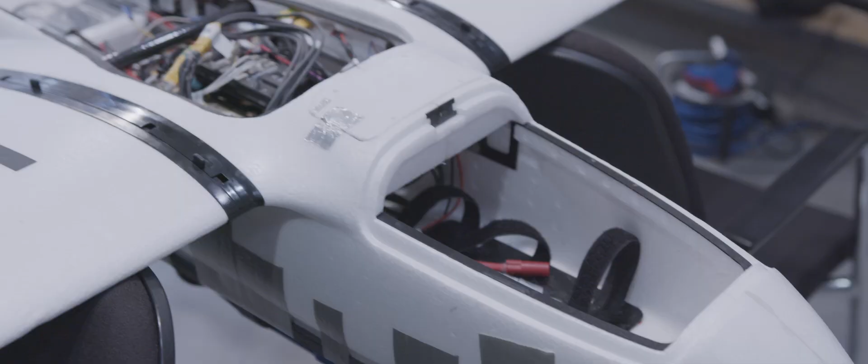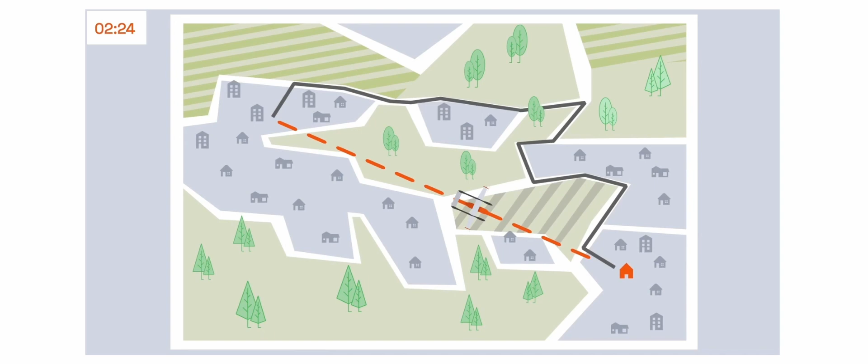The aim of the project Mission Pulse is to test the feasibility of the use case through simulated test missions under realistic conditions. Our final prototype will be able to reach patients within a 6-kilometer radius in 4 to 5 minutes. At the scene of emergency, the defibrillator will be lowered with a winch under remote video supervision and can then be applied by first aiders.

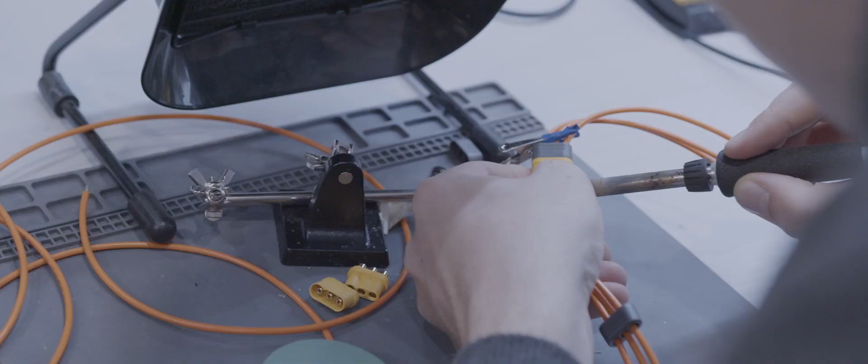Before coming to our sub-teams in more detail, we will explain the certification process. Without a certified drone, we are not allowed to enable our drone to fly in real-life scenarios. Our certification and operational risk assessment will be based on the SORA process, which is defined by EASA. Johannes, can you explain to us what exactly the SORA requires to do?

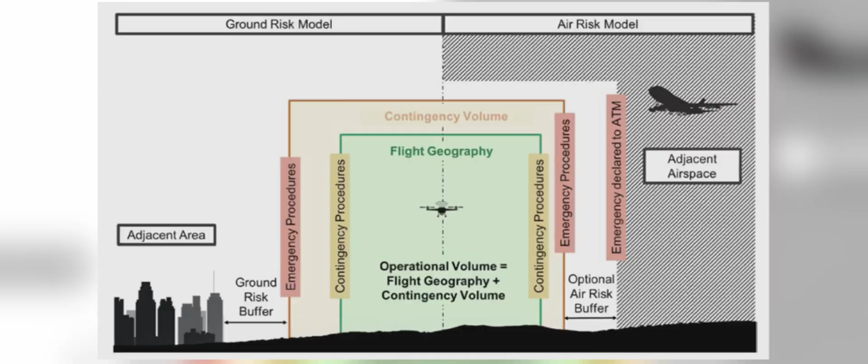The SORA process, which is short for Specific Operations Risk Assessment, defines a standard to operate inside a contingency volume. This volume includes all emergency procedures that prevent possible impacts to the ground or the airspace. A part of the contingency volume is the flight geography. The flight geography and contingency volume define the operational volume of a UAV.

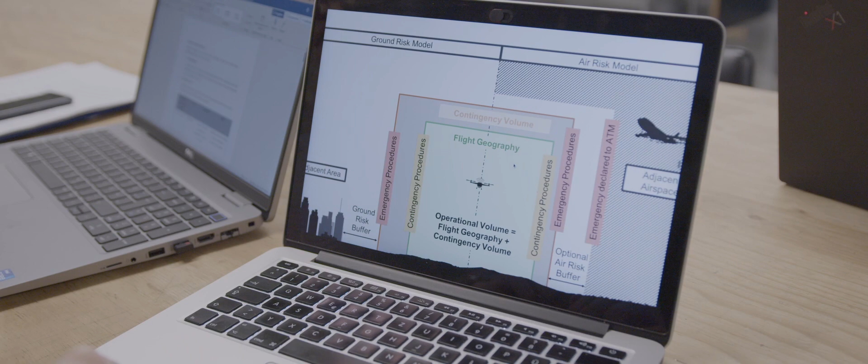We want to achieve a safe operation by reducing two risks. Firstly, the ground risk, possible risks for the ground below a flying object. This means whenever there is an emergency, our last line of safety is a parachute. With this procedure, we lower our ground risk.

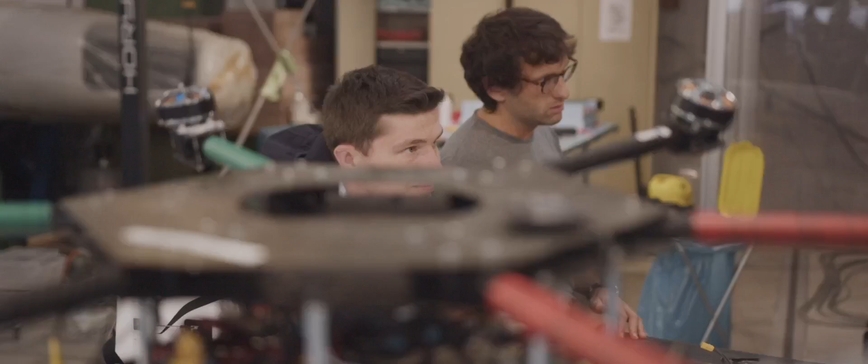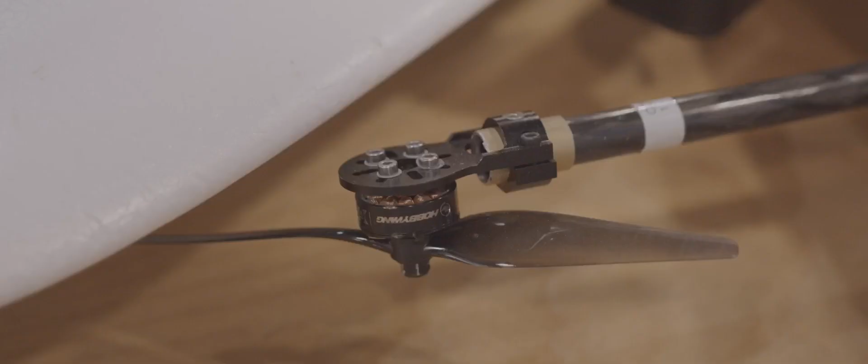Secondly, for possible risks in the air, we assume to operate inside an uncontrolled airspace, flying over rural areas with an altitude lower than 500 feet. By reducing those two risks, we fulfill certain categories in the SORA. More safety measures to our flight will be the determination of zonal safety, calculations of kinetic energy in case of impact, and details to our integrity and assurance level, developing a robust and secure aircraft.

So far, we learned what Horizon plans to achieve with their project Mission Pulse and what the operational requirements are. Now, let's see how Horizon plans to achieve this. To work efficiently, the team is divided into 5 sub-teams. The first one is Business and Certification. Let's talk to Sonja, a member of the Business and Certification team, and see what her tasks are. Sonja, can you explain to us what you do?

I'd love to. So in my team, besides discussing and evaluating the certification and mission requirements, we take care of all the non-technical aspects around Horizon and Mission Pulse. One of them is public relations. We take photos and videos in our workshop called the Horizon Lab, on the flight testing field, and whenever we have team events, then we publish them on our social media channels.

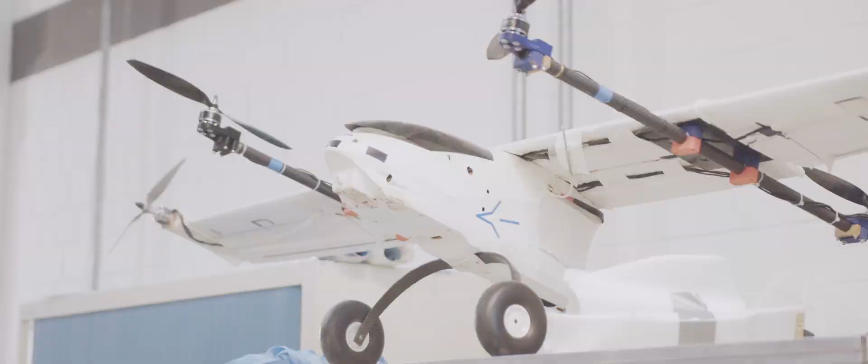We make sure to highlight the differences between our 5 sub-teams, and we want to show what the day-to-day tasks look like. Furthermore, we answer all requests from press and from other students outside of our organization. Strongly connected with PR is the funding process. No money, no project. We are all students, and HORYZN is a non-profit student organization. Therefore, we depend on our sponsors and supporters.

We are very proud and thankful to already have so many great partners who provide all the necessary resources to work on Mission Pulse, may it be by financial support or material donations. If you are interested in being part of our project and help us realize Mission Pulse, you're more than welcome to contact us.

Besides the funding activities, our team also manages the budget, which means buying material on the one side and accounting all the activities legally correctly on the other side.

Another task for our team is the organization of events, whether external, such as our rollout event, or internal, such as our trip to Berchtesgaden in August. We prepare and organize events to foster our teamwork in external relations.

Last but not least, Mission Pulse is not only about developing a UAV which can fulfill the requirements. In the end, the mission is about saving lives. By providing the defibrillator only a few minutes faster than the ambulance, we can triple survival chances. Of course, this goes hand in hand with the application of an AED after we lowered it to the ground.

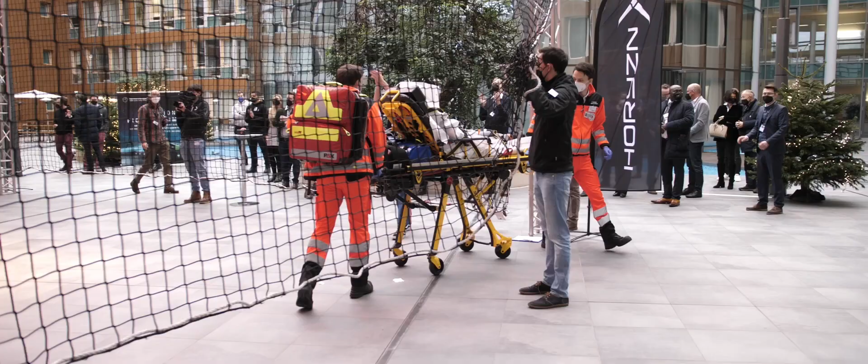So, besides looking for the perfect defibrillator, our team is also in contact with paramedical services, first responders and operators. Who is applying the defibrillator? Where does it make sense? How do we integrate it into the rescue chain in a meaningful way to complement the ambulance? We do a lot of research to find the optimal environment for our drone.

Once certification and mission requirements are determined and evaluated, our next sub-team aims to come up with a suitable drone configuration for our use case. Here's Philip, sub-team lead of our design loop. Their team consists of 15 students, most of whom are studying aerospace. Philip, can you tell us a little bit more about how you come up with a suitable drone configuration and what are the main aspects that you have to consider?

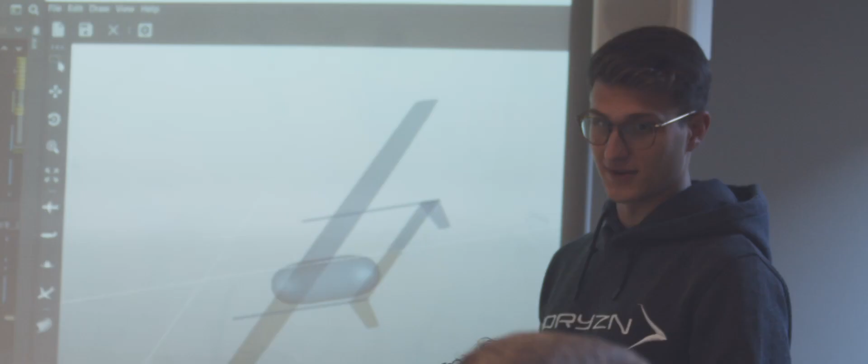The key design drivers for the eVTOL are based on mission performance, such as cruise speed, altitude, takeoff mass and range. We also consider the certification part. For example, the redundancy. There must not be any single point of failure in the system. For finding a final drone configuration, we divided our design process into a conceptual and a preliminary design phase.

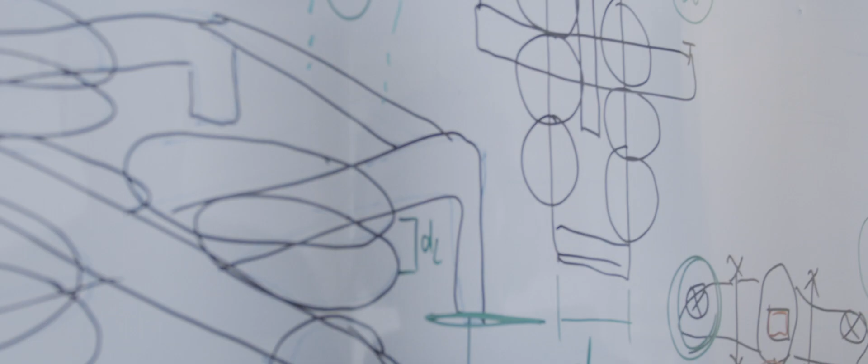In the conceptual design phase, we compared different drone configurations like a helicopter, multicopter or different fixed-wing configurations. These configurations were rated by aerodynamic efficiency, modularity, masses, safety, complexity and further criteria. Based on this rating, the most suitable configurations were pre-selected and the first mission calculations were conducted. Based on numerical values, the best configuration was selected and investigated in the preliminary design phase.

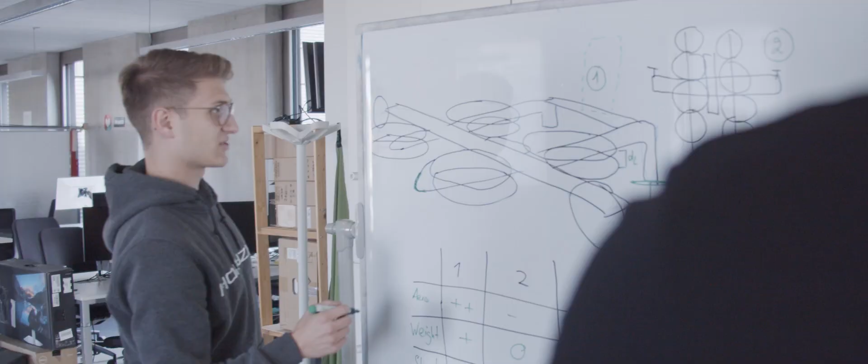As a result, for Mission Pulse, we decided to use a fixed wing configuration with separated rotor systems for hover and cruise flight. One of the biggest challenges in aircraft design is that all design parameters influence each other. For this reason, we built our calculation methods as a loop to iteratively determine the final configuration. This is also where our sub-team name, Design Loop, comes from.

For the preliminary design, we split the different design disciplines of the aircraft into the following 5 sub-modules. First of all, in the flight path module, the trajectory is generated based on the mission segments and operating conditions. Out of the trajectory, we determine the different flight states of our mission. In the aerodynamics module, the forces and moments on the lifting surfaces are calculated.

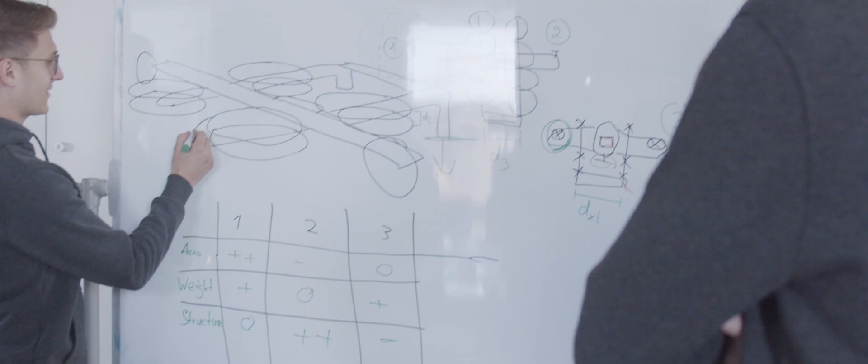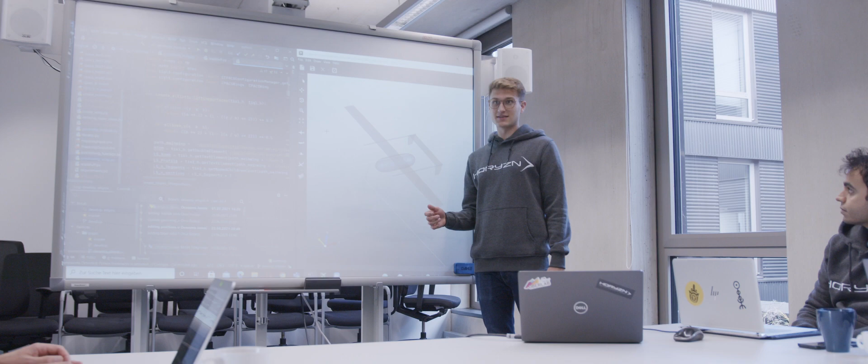Afterwards, based on the forces and moments, the structure of the drone is determined to withstand the bending and torsion of the wing surfaces. Out of this, the masses of the wings and empennage are calculated in the structure module, which is our third submodule. In the performance module, the mission required thrust and power of the propulsion units are also calculated. Within this module, suitable motor, rotor and powertrain configurations, as well as the battery system, are selected out of a database based on torque, efficiency and masses.

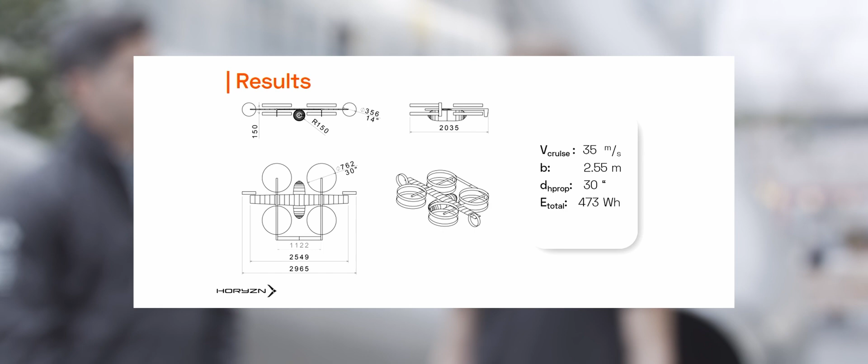Finally, in the geometry module, the modified geometry out of the calculations is modeled. All submodules are self-coded in MATLAB and Python, and the whole loop is integrated in our toolchain management software RCE. The final configuration has a span of 2.55 meters and the takeoff weight is approximately 17 kilograms.

We just learned that the design loop team iteratively repeats their calculations until a final design is fixed. With that final configuration, the next sub-team can keep working. This is Kevin, our head of CAD. Kevin, can you explain to me what you do once design loop forwards you their final results?

Yeah, of course. So we get the final drone configuration from the design loop team, and our job is to model and design a prototype. And for the Mission Pulse project, the prototype's name is Frankenstein 1. And most of our work is actually in front of the computer.

So we take the theoretical values that Design Loop gives us, and we transfer or translate that into a model through computer-aided design. And our job ends with delivering molds or tools to the structure team for them to start their manufacturing phase.

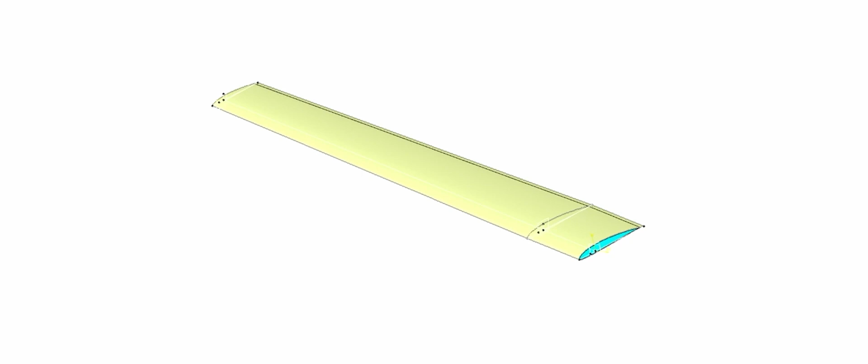The most challenging part of this process is to find technical solutions that are within our weight budget, economically viable and compliant to our manufacturing method, while still maintaining structural integrity in regards to the forces on the aircraft. Each section of the aircraft also requires different design solutions, as the forces or weight requirements are different, presenting varying levels of complexity in each design process.

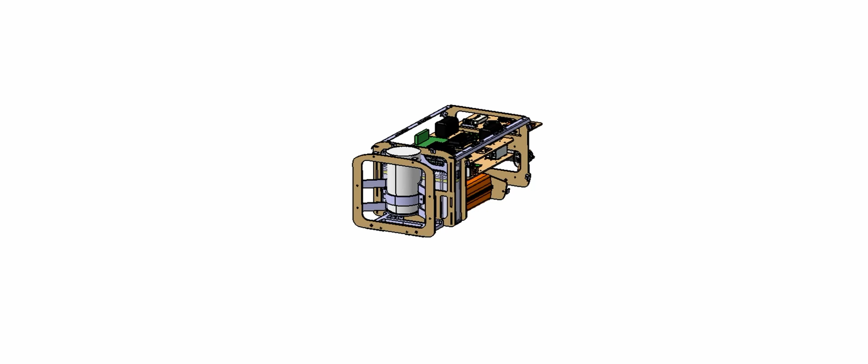As an example, the biggest challenge of the fuselage is to integrate the number of subsystems, such as the electronic plates, the rope mechanism, and the warning system. They all require sufficient space, specific positioning, and a suitable mount to the fuselage. A big organizational challenge, on the other hand, is the coordination between the sub-teams, which often prove to be the bottleneck slowing our design process.

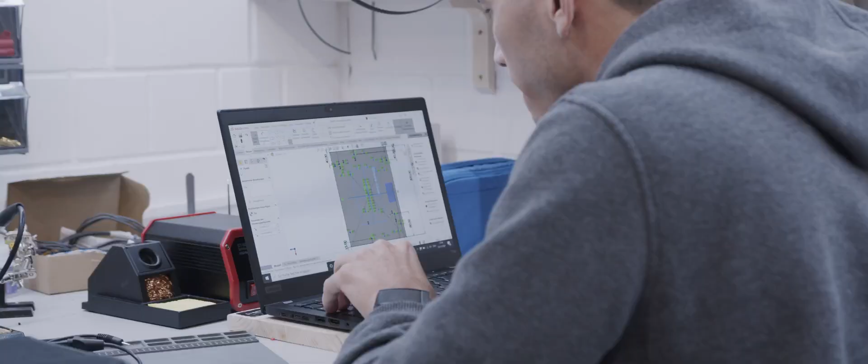Our way to tackle these challenges, while still trying to meet our deadline, is to subdivide the drone into sub-assemblies. Therefore, we have the fuselage, wings, tail, and hover boom, and assigning 2 or 3 team members to each sub-assembly allows a parallel workflow, while still having long brainstorming sessions together to tackle the bigger problems.

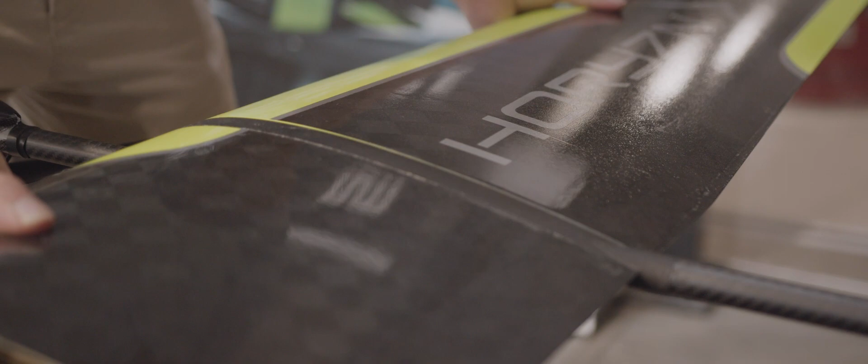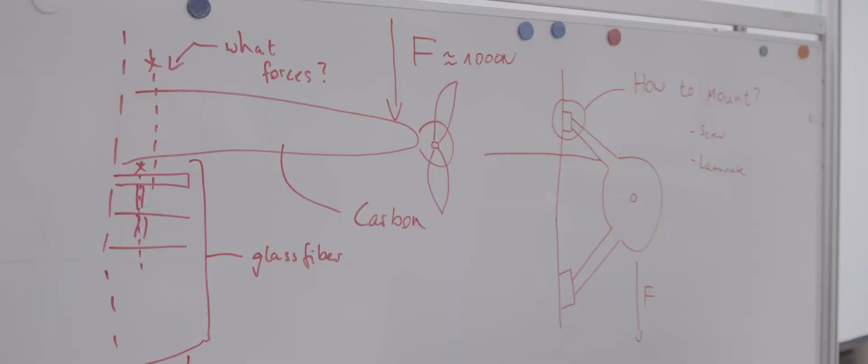For problems that we cannot solve ourselves, we implemented a technical review meeting where representatives of all sub-teams and advisors are present. We also decided to delegate the aesthetic design work to a professional design company, which allowed us to focus on the engineering process purely. We are very happy and proud to have contributed to the team, and we're very grateful for the experiences we gathered along the way.

That sounds great so far. So we have certification and mission requirements. We have a drone configuration from Design Loop and a 3D model of our prototype Frankenstein 1. By the way, if you're wondering where the name comes from, feel free to come by our lab and ask us. This is also where the physical work gets done. Here are Osama and Cosima from our structure sub-team.

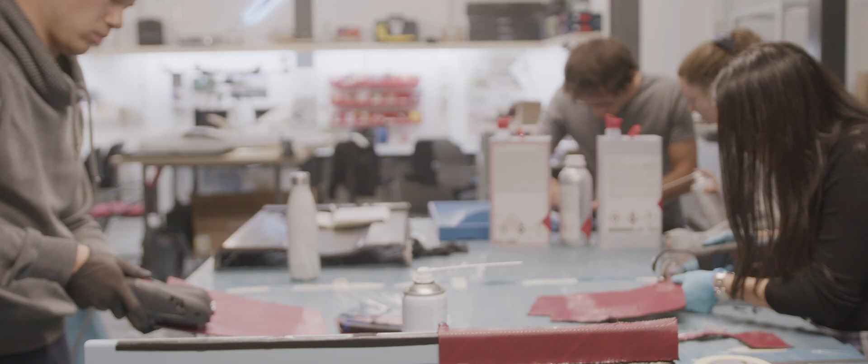Welcome to the structure team, where we build the prototypes in our workshop. We would like to give you a glimpse of our work in the workshop by taking you through the manufacturing processes. When the CAD sub-team finishes their models, the first step is to get the epoxy boards milled to form our master blocks. The master block looks very similar to the final part. Once we finish sealing the surface, the master block is ready for the tooling prepreg.

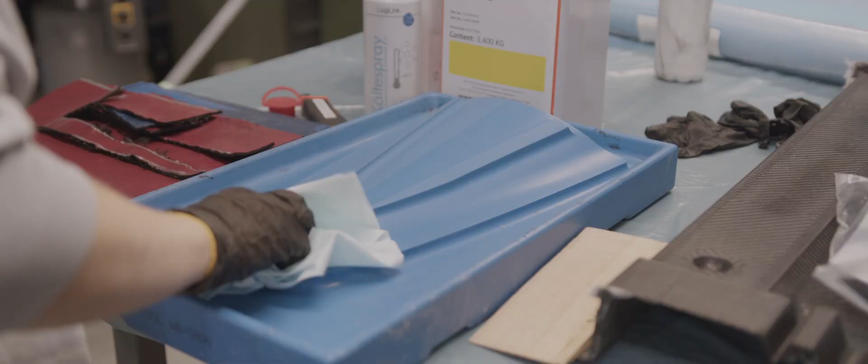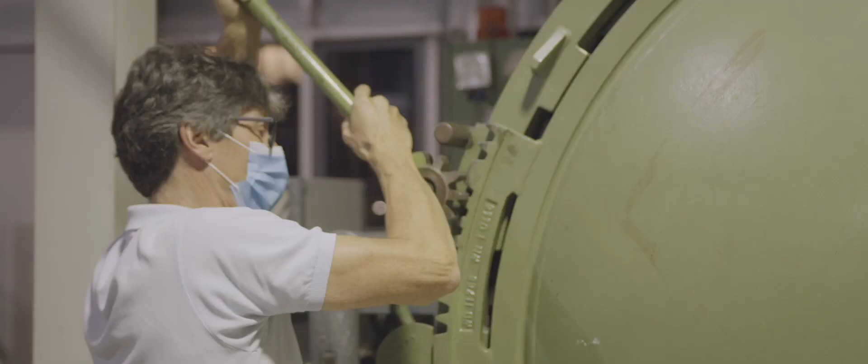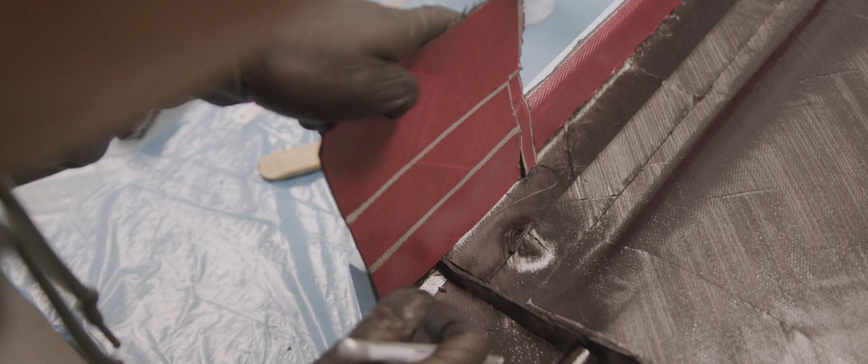Tooling prepreg is a specific kind of pre-impregnated carbon fiber textile, which is used to create the tool. We drape the tooling prepreg perfectly onto the master block and apply vacuum between the layers to get rid of any entrapped air. The master blocks are then put in the autoclave, a large pressure vessel that uses high temperature and pressure to cure the tools. Once out of the autoclave, the tool is removed from the master block and serves as a negative mold for our final parts.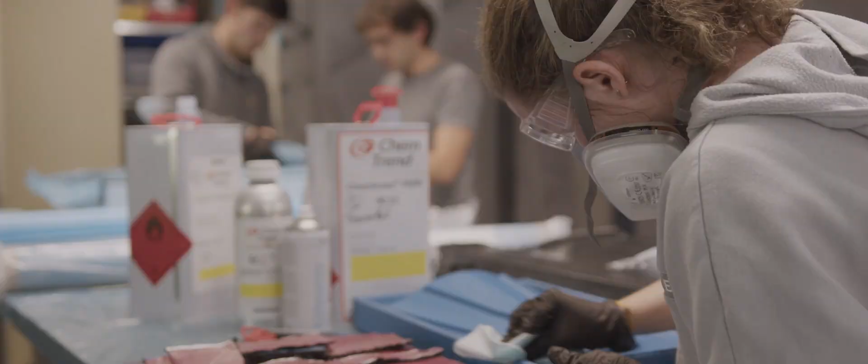Similar to last year, we are hand laminating our parts. However, this year we are also using carbon prepreg for our layup. We use a combination of foam, carbon, and glass fiber layers to achieve a good stiffness while keeping the weight as low as possible. We put in extra reinforcement in certain places where the loads will be especially high. The part itself is also cured in the autoclave. The finished parts are then assembled using a variety of connectors. Finally, the drone is ready to get tested by our flight testing team. If you want to find out more, come visit us in our workshop.

Some of our members are also working on subsystems, such as the parachute and rope mechanism. Another crucial system is the rope mechanism, which is designed to lower the payload safely and reliably while the drone is in hover flight. The challenge with this is to guarantee a soft landing during every deployment and in various environmental conditions. The use of a servo motor enables the pilot to manually control both the deployment speed and deployment direction to account for different ground conditions and also weather conditions.

We are almost at the end of our day-to-day operations. When Structure finishes the manufacturing, the prototype can be tested by our final sub-team, Avionics and Flight Testing. They only have one goal, to finally make Frankenstein 1 fly. Aurora, is that correct? Yes, absolutely. And by testing the prototypes, we get to see how everything works together after a whole year of work.

To complete the task we defined for Mission Pulse, we need various systems to work together, including hardware and software. Things can get very complicated quite fast. Therefore, we always start simple and increase complexity gradually, because building the whole aircraft and hoping that everything works at once is not efficient. Failures will definitely occur.

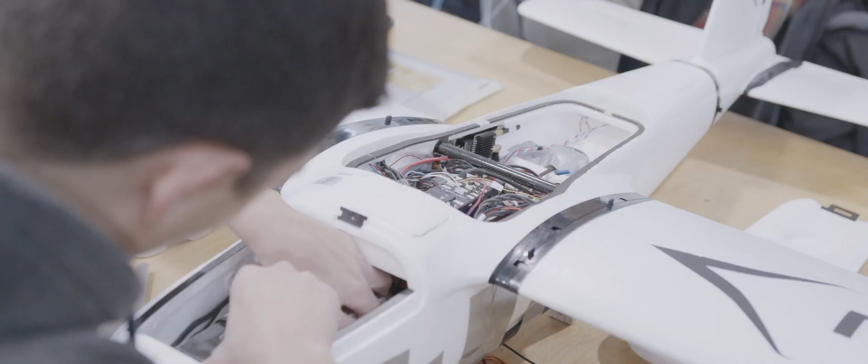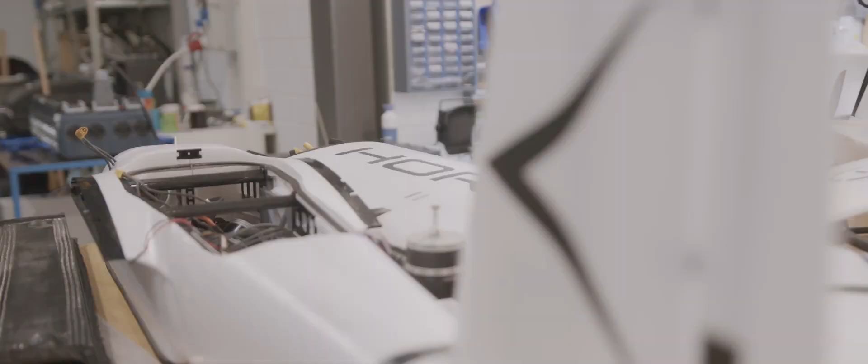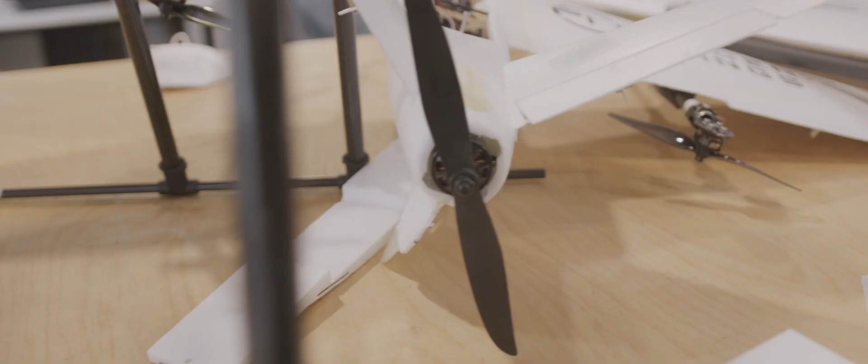So we integrate and test various subsystems on dedicated prototypes before putting them all together for Frankenstein 1, our first prototype. We use quadrotors and small eVTOLs to test the software we develop and bigger prototypes to test heavier systems such as the parachute or the rope mechanism. We prepare our prototypes in the workshop and as soon as they're ready, we conduct flight tests to verify the correct working of the drone and of its subsystems.

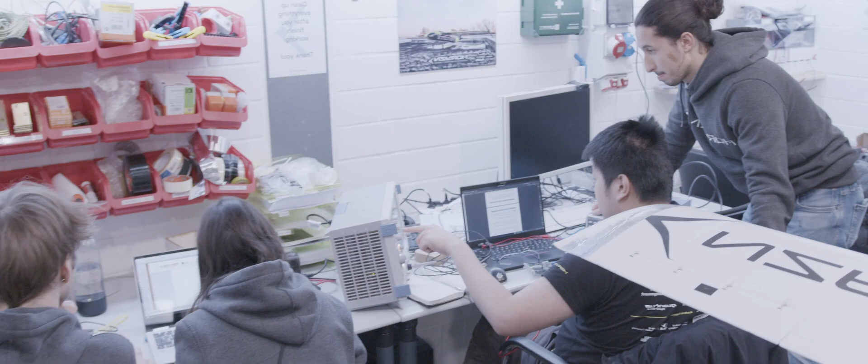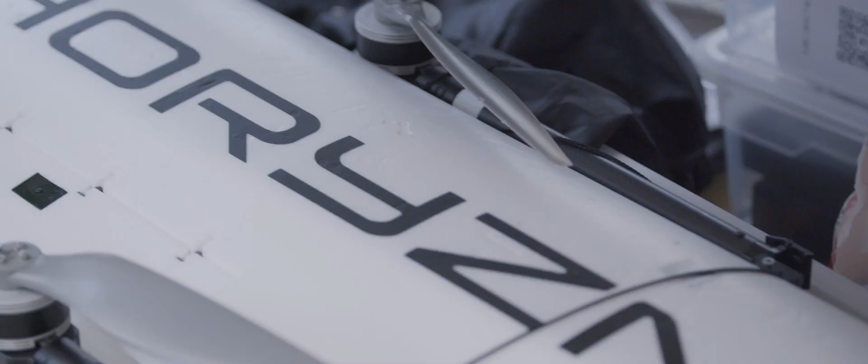Before going to the flight field, some preparation is needed. We use checklists to make sure not to forget anything and to follow the procedures in the correct order. On the flight field, there are several roles. The flight manager goes through the test card and makes sure that all operation runs smoothly. The operator is the person in the ground control station that monitors the flight data and guides the pilot, who flies the aircraft. Finally, there is a flight engineer who checks and assures the readiness of the aircraft. After each flight, we evaluate the performance to improve or to validate the setup.

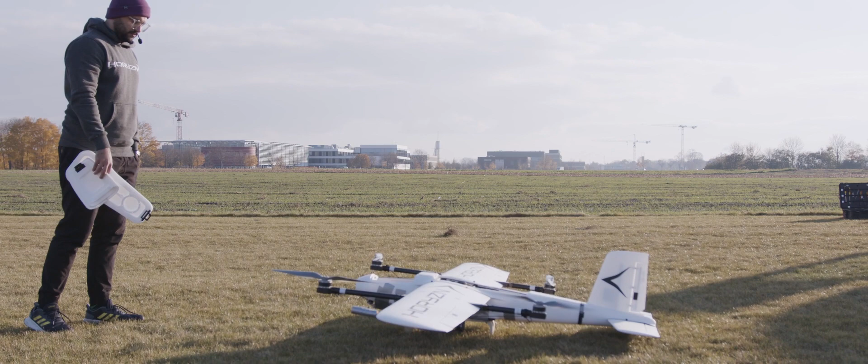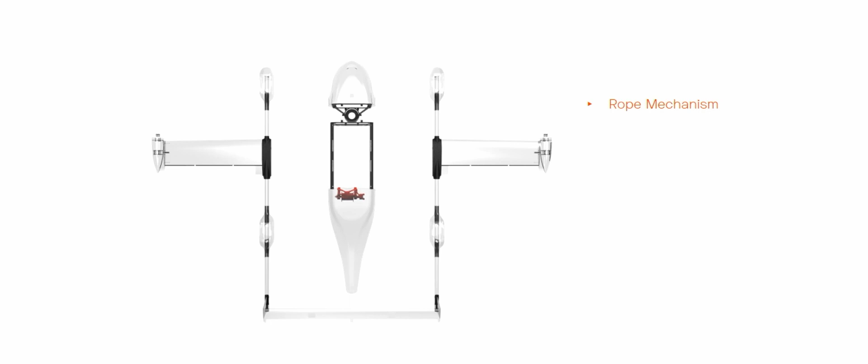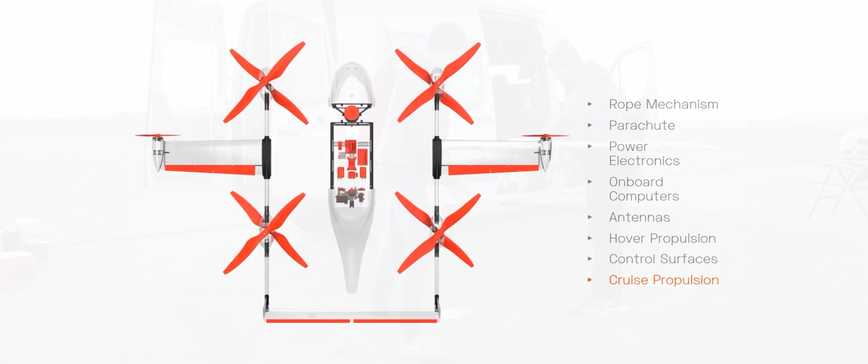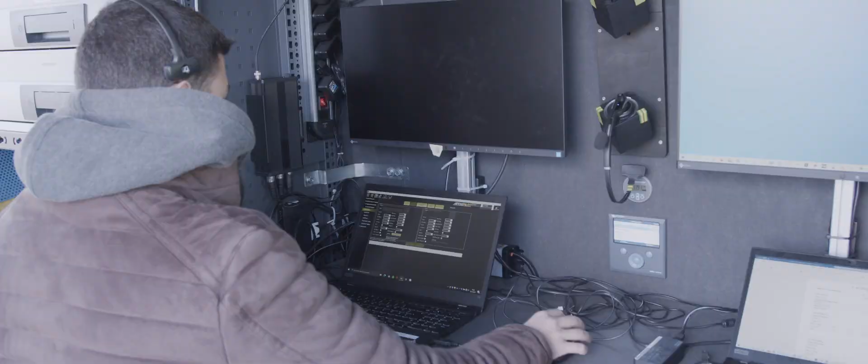Although a lot of experience with flight tests has been gained in the last year and procedures have been optimized, flight tests remain time-consuming and costly. To shorten the time on the flight field and eliminate simple errors, we set up a hardware-in-the-loop. This so-called HIL allows us to connect all subsystems first before testing them on the real aircraft. We can test individual components all the way up to the entire wiring harness. With additional equipment, we can monitor signals, currents and voltages to easily find errors. With the HIL, extensive ground testing can be performed on all subsystems before they are integrated into the overall system. This reduces the likelihood of potential costly crashes.

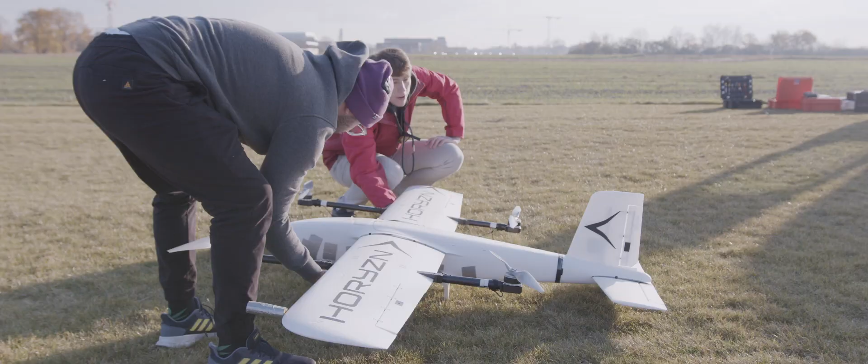We are working on several projects to improve the capabilities of Frankenstein. The aircraft will fly beyond visual line of sight, which requires a robust data and video stream over long distances. We develop custom electronics for high current and voltage applications to increase safety. Moreover, we work on our own flight control software to get the most out of our configuration, and we use state-of-the-art tools to make accurate models of our aircraft.

To automate the whole mission, we deploy artificial intelligence algorithms, which reduces the operating workload so that the pilot only needs to intervene in case of emergency. For testing those new features, we are building a simulation environment, which will be used to reduce time and cost-intensive flight testing for testing rather simple and basic features.

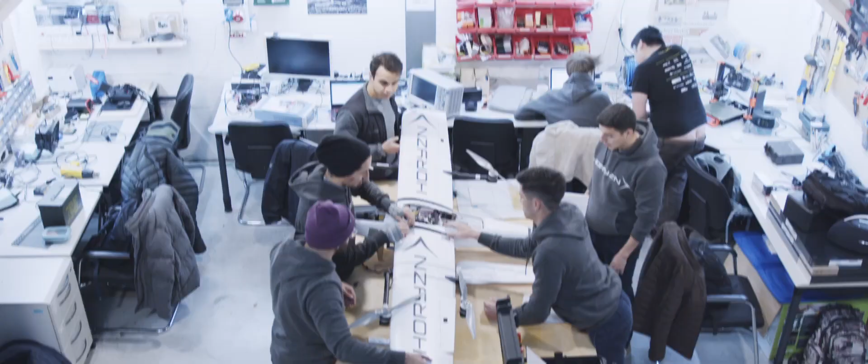So, after visiting all of the subteams, we're at the end of our little tour through Horizon. The prototype which you're about to see is the result of long days and nights, of weeks and months of dedicated work. But when a team spends so much time together, the result is no longer just to get a working prototype into the air. Horizon is not only a team, it's also a family with many different characters, where everyone has their reason why they are part of Horizon. For me personally, Horizon is the aerospace of tomorrow.

Innovation, flexibility, trust, ambition, our common goal, spontaneousness, passion, learning, inspiring, international, history, fun, growth, responsibility, perseverance, flying planes, opportunities, night shifts, future, bouldering, saving lives, challenges, integrity, dedication, diversity, innovation, teamwork, life-changing, friendship, community, united, family. Finding solutions.

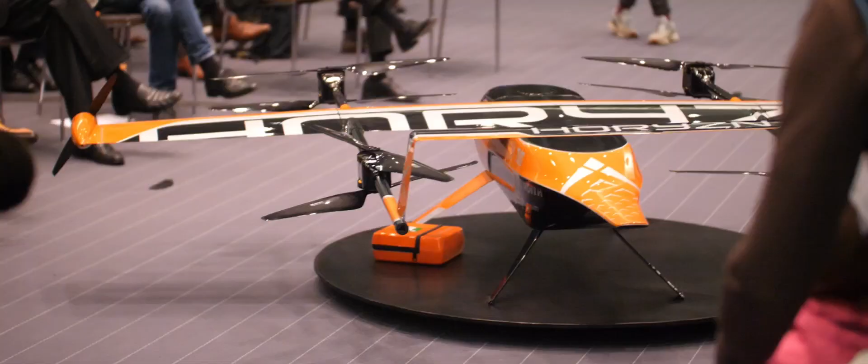So finally today we are here after one year, and for me the most important thing is that actually not everyone gets the chance to show their work to such an audience, and not everyone gets the chance to work in such a beautiful team. So this is the most important thing for me. I'm just enjoying the moment because probably one year after that, or even tomorrow, we will be like, oh my god, that was amazing. So I'm just trying to enjoy the moment. It's fine. Yeah.